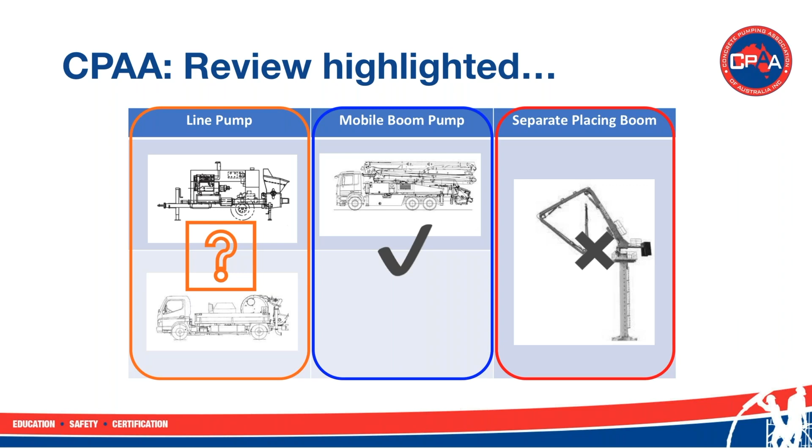I think the most controversial issue was a continued approach towards a prescriptive requirement for 6-yearly mandatory strip downs, and there was increasing conflict with a document that was nearly 25 years out of date with international standards, and moreover, manufacturers' requirements for modern equipment.

And I think the most controversial issue was some legal action which was potentially being touted, as the draft circulated for public comment was potentially triggering technical barriers to trade. I won't go into detail other than to say standards have a fairly clear responsibility to ensure they don't incorporate technical barriers that prevent trade under the WTO, World Trade Organization.

So after that review, we submitted a report to Standards Australia for their consideration. After a series of meetings with Standards Australia over 2015, Standards Australia decided to collapse the subcommittee, which was formed under the Cranes Code Committee, Subcommittee 15, and a series of open forums were conducted in 2015 to really engage with our key stakeholders.

Out of that 2015 meeting, we then drafted a project proposal, and we were essentially provided approval in early 2016, and a new technical committee, ME091, was formed and constituted.

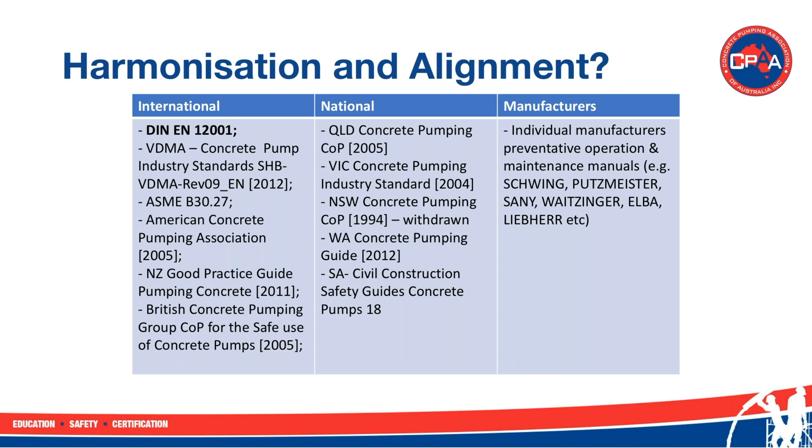So now that brings us up to 2016. The Code Committee kicks off and the document's published in 2019. I'm not going to give you a blow-by-blow description of what transpired over that period, other than to say from May 2016 through to January 2019, when Standards republished the updated version, there was a considerable amount of effort placed in engaging and consulting and work done on behalf of the Code Committee.

The point I'd like to highlight here is that in April 2018, when we went for the first public comment, we received a total of 129 comments, many of them fairly repetitive. In contrast to the 2013 review, where there were 400 plus comments, the committee felt somewhat satisfied that it had done the hard yards, and somewhat vindicated that it had done the research and produced the evidence to support the changes in the document.

So really that brings us up to the publication of the document. I'm going to spend the next sort of 20 minutes going over the summary of changes. It's going to be difficult for me to go through it line-by-line, but I'm going to focus on the key elements and then focus in on some key issues as we get to them.

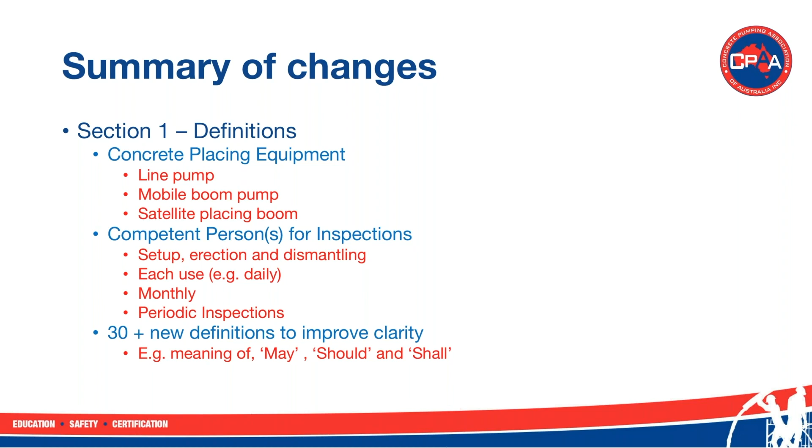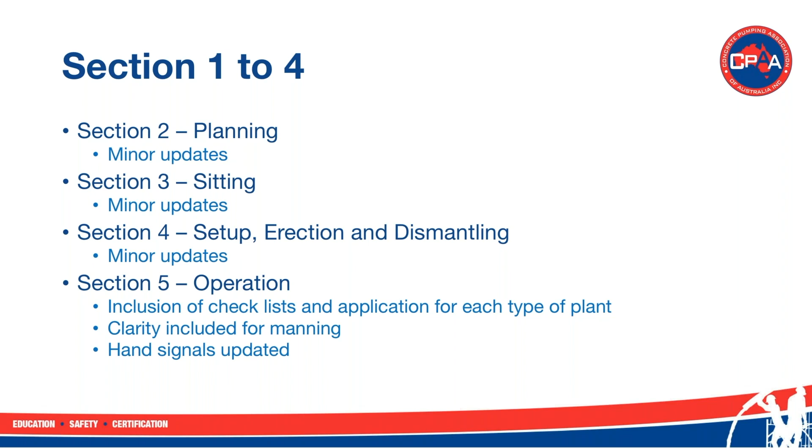So if there's ever any lack of clarity, the document gives advice about how each of those statements should be treated. The next sections are 1 through to 4: planning, section 2, some fairly minor updates; section 3, again minor updates; and setup, erection and dismantling, minor updates. With regard to section 5, that's probably an area we focused a fair amount of energy on, and in particular we included a checklist with regard to each type of plant.

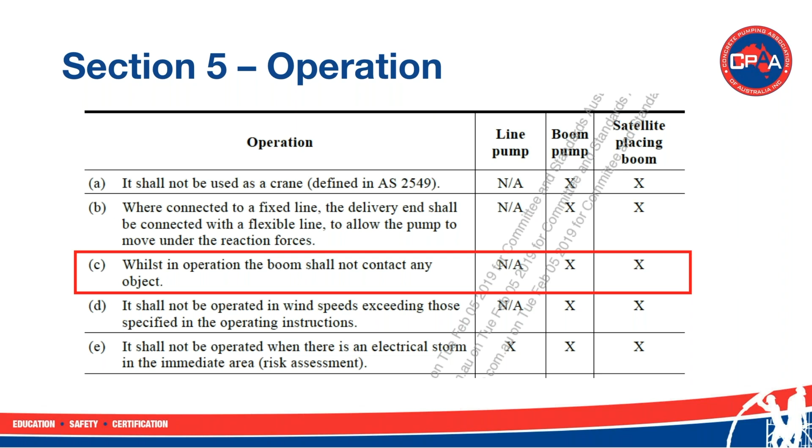I've just got a snapshot from the document to highlight an example of how that table operates. A particular operation condition is stated, and I've highlighted item C: whilst in operation, the boom shall not contact any object. For a line pump that's probably not applicable, but for a boom or satellite placing boom, that's important - it's a mandatory statement within the operational guideline.

Another example I wanted to draw on - and we at the association probably get a question on this every week - is with regard to outriggers or stabilisers. Many state safe work regulators have equally got opinions or views about this particular issue. But the way the association has articulated this is that modern placing equipment has sophisticated sensors built in to allow it to be operated either fully extended or short-rigged, which is something permitted by the individual piece of plant or equipment.

So we have incorporated within item F: where permitted by the manufacturer, short rigging conditions and limitations stipulated by the manufacturer or the competent person shall be observed before operating the pump, raising or unfolding the boom. Again, not applicable to a line pump, but clearly applicable to a boom pump. I think that helps clarify in the document how that should be undertaken.

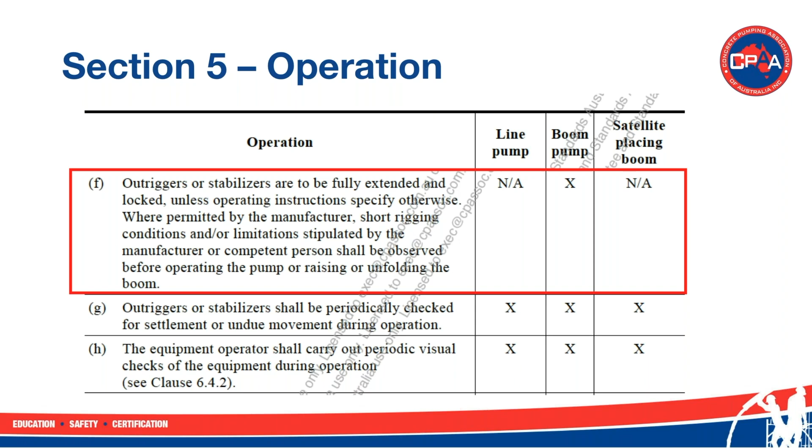And if your piece of plant or equipment does not have a manufacturer that stipulates the ability to short rig, then you need to observe the manufacturer's operating instructions.

The next item, in section 5, is around manning, and the association's taken many calls on this issue. In one of the drafts we were considering, it was viewed by state WorkSafe regulators that they wanted a minimum of 2 people operating on a piece of plant at any one time. Across our 1,300 concrete pumping operators, there are a lot of single-man operations, and that's part of how they operate their business and have for many years. A mandatory requirement for 2 people was seen as potentially closing their business down, or they didn't want to operate that way.

The manning discussion went on at length within the Code Committee, but ultimately we moved towards a recommendation statement: that the concrete placing equipment should be manned by a minimum of 1 pump operator or 1 boom operator, plus a line hand where required and a spotter where required. It's important to note, however, that the boom operator and pump operator may be the same person, with the one stipulation that they shall not manipulate the boom or handle the hose simultaneously.

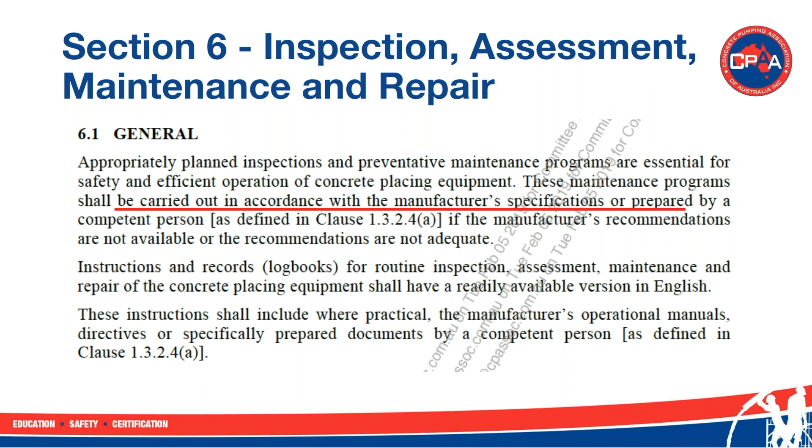Focusing on the relevant areas for major updates, these relate to logbooks for assessment and recording, pre-operational inspections or each use, which, as mentioned earlier, relate to daily routine inspections, monthly and periodic inspections, as per the criteria.

Also in section 6, we've expanded and improved provisions, catering for both single and double wall pipes. As many of you would recall, the 1994 document really only addressed single wall pipe because double wall pipes weren't available in those days.

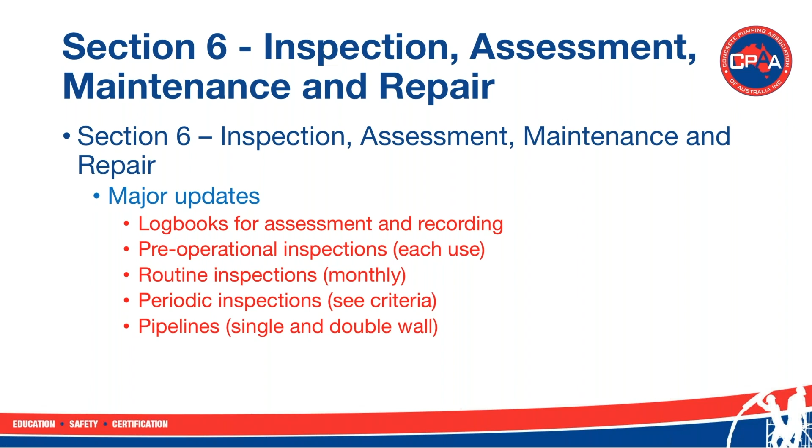With regards to the logbook, and this is an extract directly from the standard, the logbook shall, as a mandatory statement where applicable, record serial identification, hours operated, kilometres travelled, daily, monthly and periodic inspections, adjustments and modifications, part renewals, pipe wall thicknesses, boom and pedestal condition, outrigger beam and boxes, and safety equipment fitted.

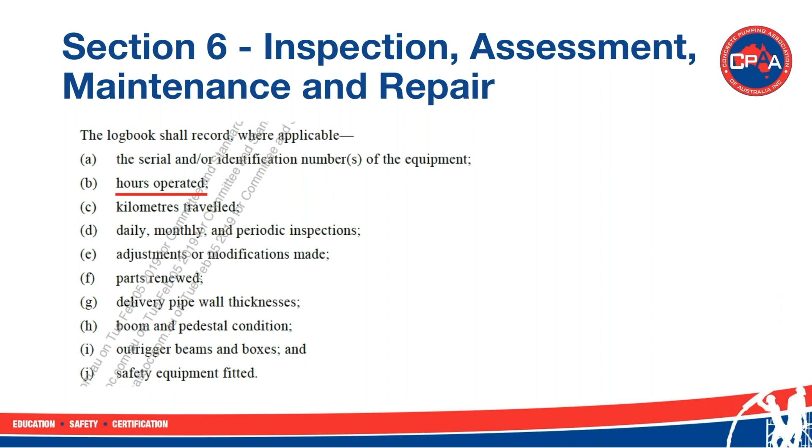With regard to periodic inspections, I'm going to focus on that area because both daily and monthly are predominantly similar to the way they were structured in 1994, and I think they're fairly self-explanatory in the document. But I believe periodic inspections require a little additional attention.

As a scene setter, many of you would recall that we talked about the old standard being a rather prescriptive one, and looking at international standards like EN 12001, moving towards a performance-based requirement or criteria. Using that as a framework, we've developed our periodic inspections to reflect a more performance-based approach.

Let me explain how that works. Periodic inspections have to be conducted by a competent person, which is again defined within the document. It's clearly a means for early detection and repair of service damage. That's a really important element in this.

Within the document, we not only make reference to the manufacturer's requirements, which are spelt out in the manuals provided by the manufacturer, but we've also incorporated a detailed inspection table in Appendix B of the document, and I'll show you in a little while what that looks like.

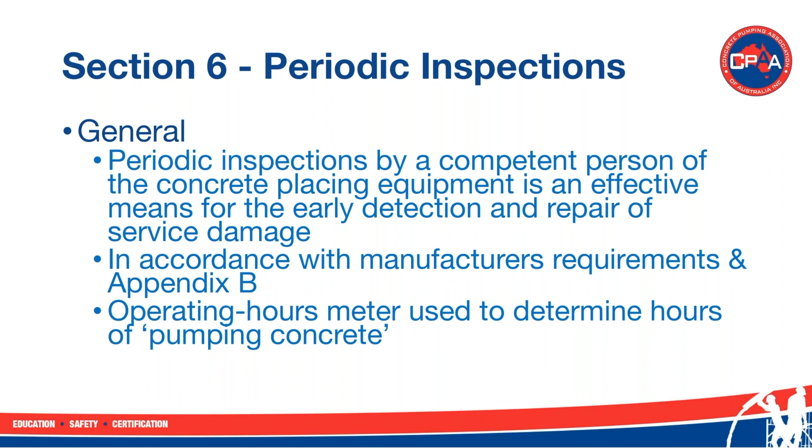With regards to hours operated, let me qualify that. In the document, we talk about the operating hours meter being used to determine the hours of pumping concrete. That's not hours of driving the truck, not hours of the truck or plant sitting on site with the engine running, but when it's pumping concrete. That becomes the key determinant for the table in the document to determine when a periodic inspection has to be conducted.

So let me explain this rather detailed, information-filled table. On the vertical axis on the far left-hand side, we're talking about the concrete placing equipment inspections: pre-operational, routine, periodic, and then there's a criteria below that from 0 to 5 years, 5 to 10 years, or more than 10 years.

Each of these, however, are noted by an asterisk, but not less than once a year, and I'll qualify that in a second. Across the top you'll see line pump, and then as defined, mobile boom and satellite placing boom. The preceding columns under each show the inspection criteria, for each use.

So if we look at clause 6.4.2, pre-operational, the inspection criteria needs to be conducted at each use. The competent person is detailed in clause 1.3.2.2 - the person that meets that definition, having the experience and qualifications, can undertake that each use. I don't believe that has changed dramatically from the requirements of 1994.

The same applies for routine, which is conducted monthly - the competent person to undertake that is detailed in clause 1.3.2.3. Coming across the page, in terms of the inspection criteria for mobile boom pump and satellite, the same applies for each use and monthly, with the same competent person as defined there.

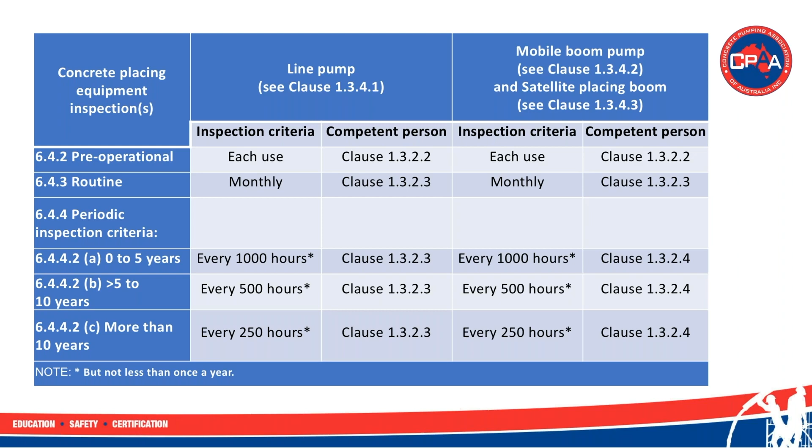Let me walk you through the stages of a periodic inspection, well detailed within this standard. The first stage is initially an audit of the equipment logbook to determine that required daily and monthly inspections and maintenances have occurred, review the record of defects, and determine repairs are being carried out.

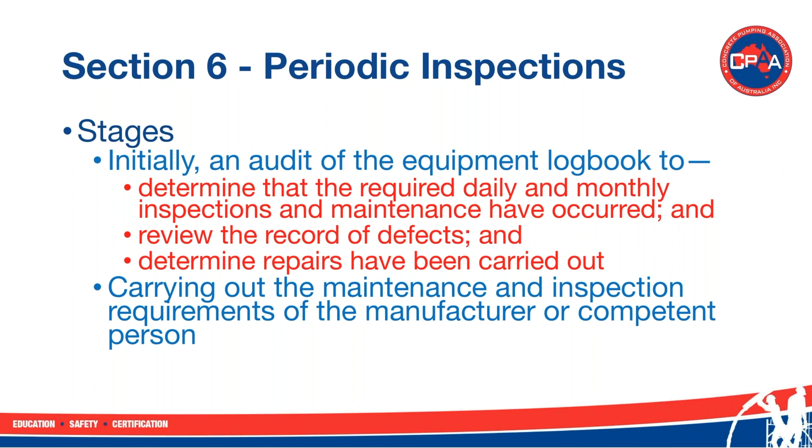Then you carry out the maintenance inspection requirements the manufacturer or competent person has defined. The next step is to complete the periodic inspection report, which is in the standard at Appendix B. That 6-page report is not a single-page statement, but represents a record of the inspection that has been undertaken. It's not a strip down.

There's no mandatory requirement to disassemble the complete pump or aspects of the pump, but to undertake an examination of the condition and components of the equipment, to take appropriate measurements of wear and tear based on the manufacturer's specifications, and to take records, whether photographs, and attach them as part of the report, but ultimately to note down aspects of wear and corrosion.

So if you bear with me for a second, I'm going to bring up the actual document and share with you an example of the report.

Okay, so Appendix B, Periodic Inspection Report. Much of the information is fairly self-explanatory: manufacturer, serial number, year of manufacture, and boom details, etc. Any particular additional features or modifications, and then you identify yourself as the person that's completed the record.

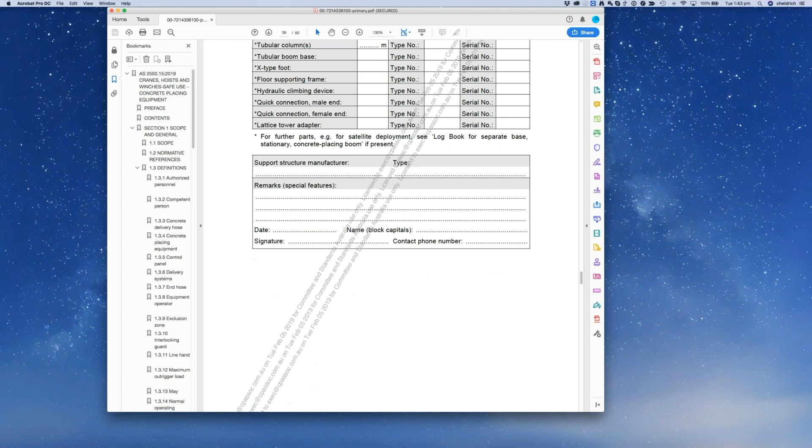In terms of general information, which forms part of the actual logbook, you need to note elements of the support structure. This deals with a satellite or separate placing boom and elements of the engineering related to that. Coming down, there is a schematic of a typical boom, and you'll note there are numbers associated with elements. They reference sections of the pump as they relate to the report.

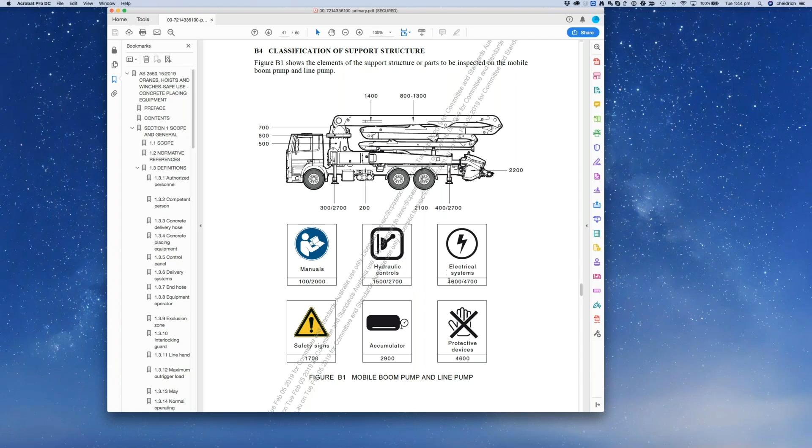You can see here that elements 100 to 2000, for example, relate to manuals. 1500 to 2700 relate to hydraulic controls. 4600 to 4700, electrical systems, so on and so forth. So when you look at elements of the support structure, each of them are detailed in a similar way, for ease of identification.

Now in terms of the report, and for those of you familiar with or who have seen EN 12001, we've adopted a similar fault code method when completing the report.

There will be 00 right through to 31 for re-inspection required, and then you identify various states, or fault codes, for each element that you're reviewing within the inspection report. For example, 01 would represent a crack, paint would be 09, or a bearing noise would be considered to be 13.

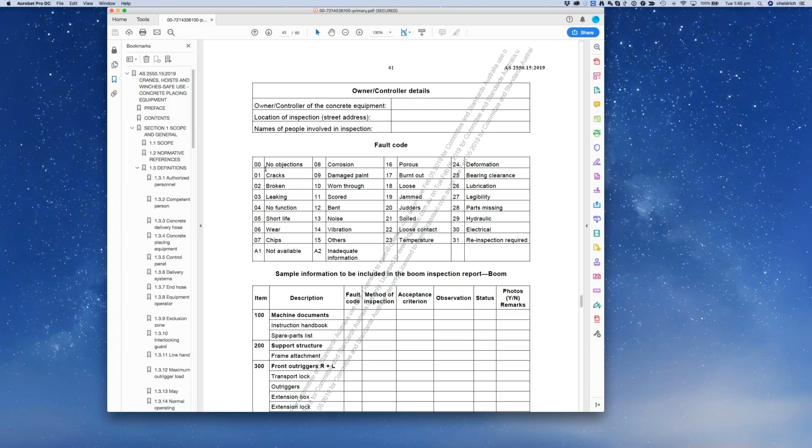Within the report, you only complete it for the relevant piece of equipment. You would identify the fault code, the method of inspection - so for a machine document 100, an instruction handbook, whether it was present, method of inspection visually, acceptance criteria was if that was present, and any photographs or remarks you might make. At the bottom of this standard, we've incorporated an example of how you may end up completing the report, just to give you some guidance.

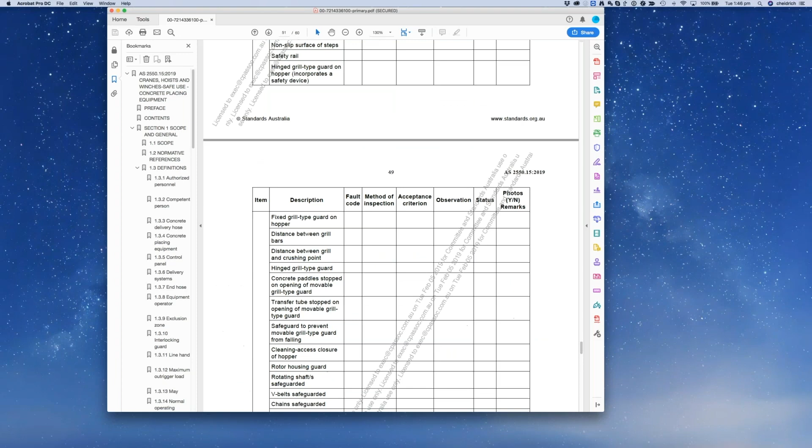So for this worked example, I've selected completed reports. The item was 300, a pivot bearing, no fault code was given, the method of inspection was using a dial gauge, the acceptance criteria, probably specified by the manufacturer, was 0.15 millimeter. What was observed was 0.12, so the status was okay, but no photo was taken.

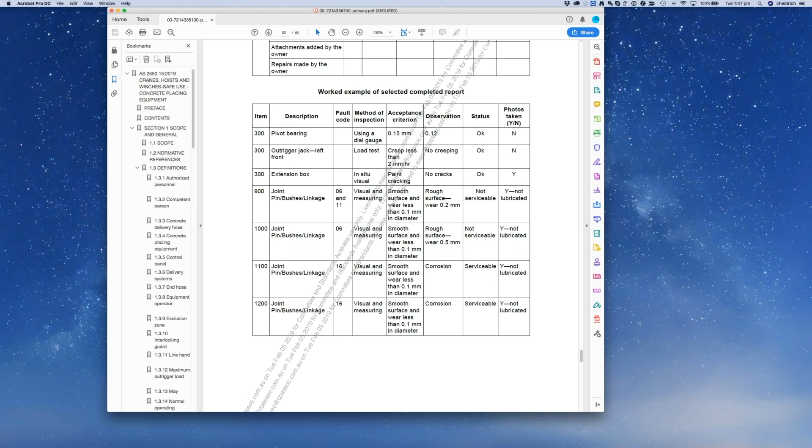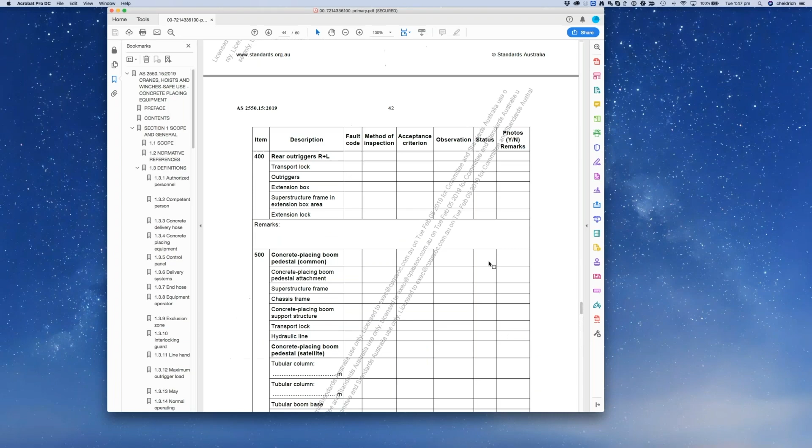But there are other examples where you would be looking at an extension box. There was some minor paint cracking, but no cracks were observed on the actual extension box itself. Status was okay, and a photo was taken to show that, incorporated within that report. These are matters for an inspector or competent person undertaking and completing this report. The association is currently working on developing versions of this report which could be built into our logbooks and used by members and non-members alike.

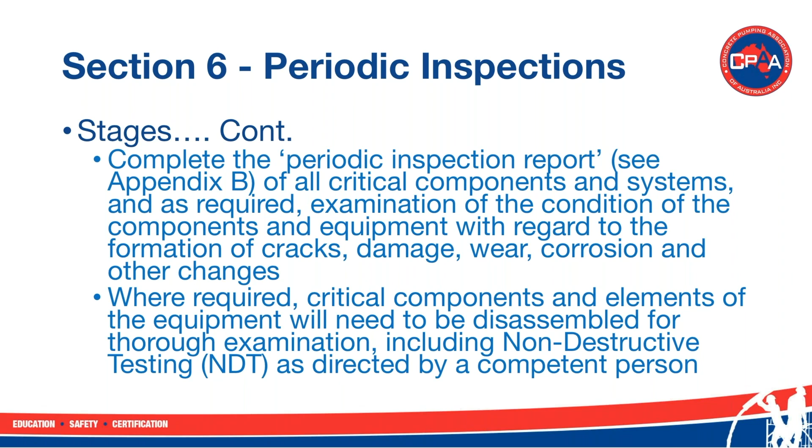There could also be use of non-destructive testing, NDT, as directed by the competent person. Once those stages are completed, the final stages are retesting of all safety functions, rectification of any defects that could affect safety, and assessment of suitability for continued service. The competent person, based on the report, determines whether things need to be done immediately, in the next 6 months, or in the next 12 months, from a risk hazard assessment. Then the competent person issues a certificate, dates it, authorizes it, and makes a statement for continued operation and service.

That, I believe, represents a major shift in thinking around the assessment, inspection, maintenance and repair of concrete placing equipment, using a performance-based approach where we're not pulling down brand new pieces of plant 6 years into service that may or may not have done a lot of service unnecessarily, but equally pieces of plant seeing high levels of demand or use are being inspected more regularly. That's where the performance-based approach is seen as relevant or applicable.

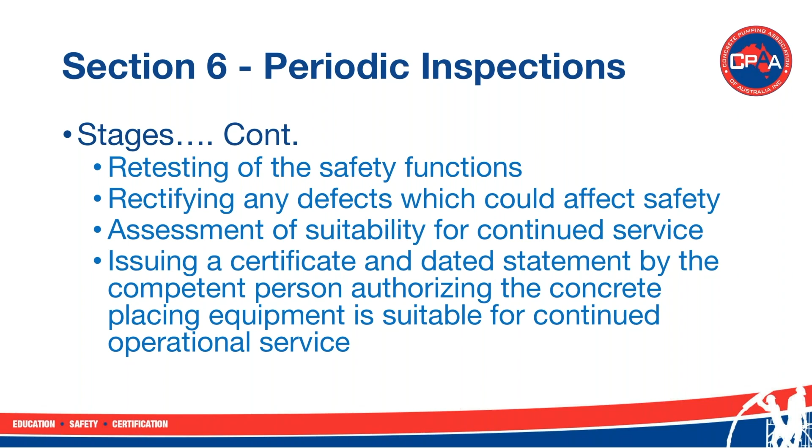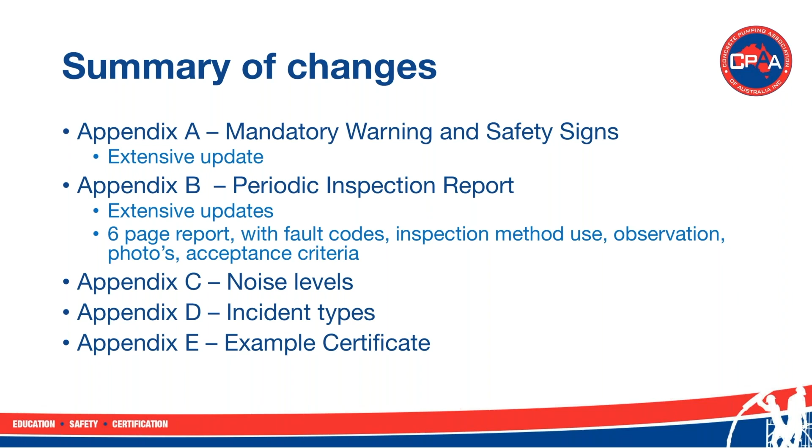In terms of the next section summarizing changes, Appendix A covers mandatory warning safety signs, which have been extensively updated and expanded to incorporate modern signage and notification - for example, one new addition from the association covers crushing incidents with the folding back of outriggers. The periodic inspection report has been extensively updated into a 6-page report with fault codes, inspection methods used, observations, photos, and acceptance criteria. Appendix C covers noise levels, D covers incident types, and E covers example certificates for continued service. So those represent the elements of the document as changed.

I'll quickly summarize a couple of things coming up very soon. Now that the document's been published, we've been working on a number of fronts while waiting for it to be finalised. One is an update of the existing printed logbook to incorporate the changes and new inspection reports. Coincident with that, the board has supported development of a digital, mobile-enabled logbook, which will be available towards the mid part of this year in a full version, with a beta version out by the end of March. We've already got a number of people signed up to help, but we welcome more. It will give you a significant advantage in terms of information sharing back to your office - more to follow in the coming months.

For more information, you can download your copy of the standard from the SAI Global website - do not go to the Standards Australia website, they do not sell the standard. They are literally the portal for management of code committees and development of documents, and they tend to be a bit slow updating their website with changes. As of yesterday, I took a screenshot of SAI Global, and I can assure you that 2550 Part 15 2019 is currently available on the website for about $249 or thereabouts.

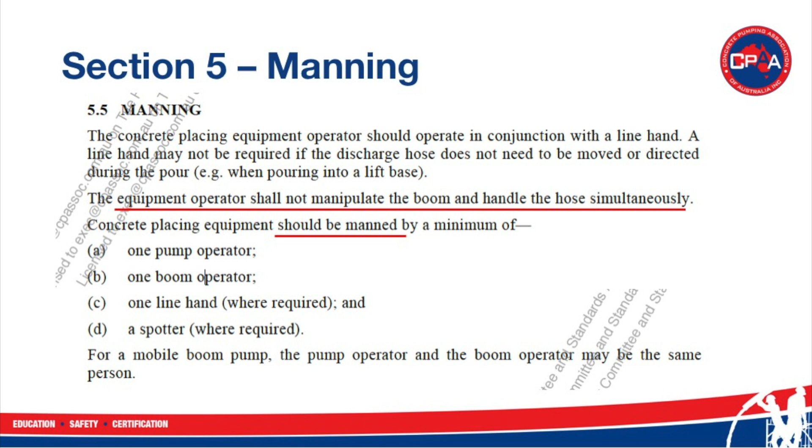Thanks, Anthony, I appreciate that. There's a general comment here, which I'll summarize as a question about the appropriate timeframe to implement this new standard. The standard is in effect from the 21st of January 2019. Many have asked when the first periodic inspection should be conducted. You're all required to do a 12-monthly, and one would expect that from the last 12-monthly you conducted, or if more recently a 6-yearly was completed, that would become the start date for conducting your first periodic inspection based on the performance criteria in Section 6.

Another question fired at me offline was, once a periodic inspection is done, does the birth date get reset? No, if it's a 20-year-old pump, it's a 20-year-old pump. If it's a 10-year-old pump, it's a 10-year-old pump. It continues on from that date. We don't grandfather the date from the original 6-yearly that was conducted. It basically starts from the last major inspection, whether it be a 12-monthly or a 6-yearly.

There's another question regarding clause 1.3.10, interlocking guards, asking for clarity on the last sentence. Interlocking guards are designed to prevent the hazardous function of operating unless the guard is closed, e.g. power will shut off and moving parts of the machine are stopped if the guard is open. The hazardous function does not automatically start when the guard is closed.

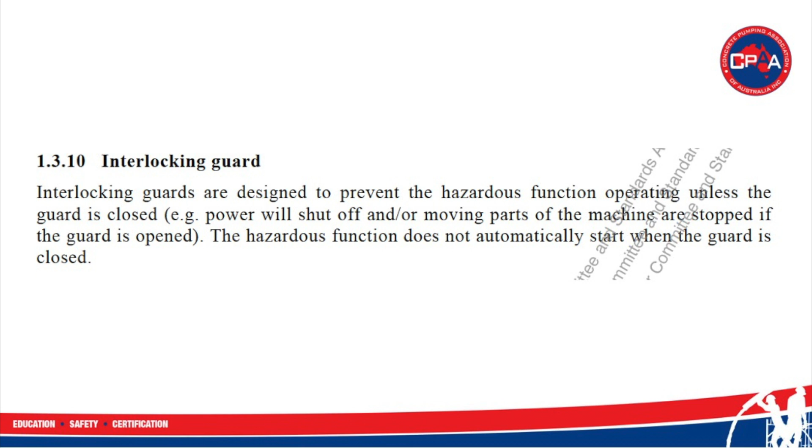Yeah, I heard a number of examples during our standards committee. There's another question regarding definitions - Simon asked if it's okay for a pump operator to undertake a monthly inspection, referencing 1.3.2.3, competent persons for routine monthly inspections.

A trade person in the field, a fitter, mechanic, or person has completed training and gained specific experience inspecting similar types of concrete placing equipment and their methods. I think the simple response is that if that person, pump operator, has gained experience inspecting similar equipment, then they are considered competent. As the business operator, it's your duty of care to demonstrate that through your own records. I think there's a requirement for most people to at least evaluate that and look at the VOC's verification of competencies, ensure their people are competent, and verify their competency on a regular basis.

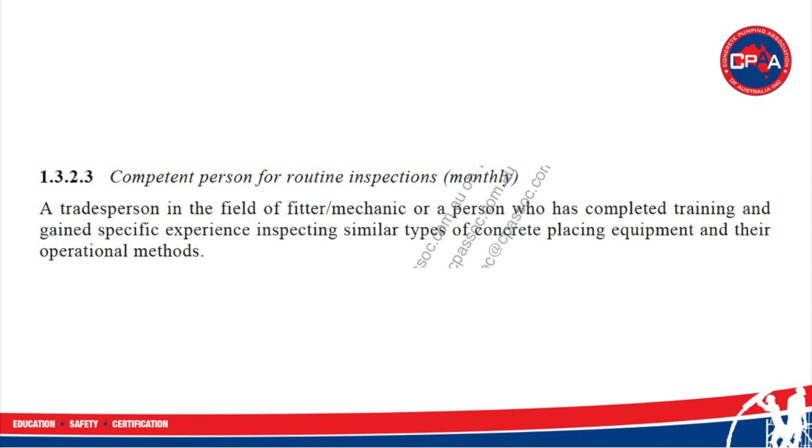Another question from Craig. What penalties are there in place if the operator is on the hose and moving the hose while pumping? Is it a fine for the operator and owner? Who will police this? Craig, my simple response to you: standards aren't laws that police and regulators will operate on.

I think the simple response is that if a safe work inspector did see an operator managing the pump and handling the line end under this standard, they could seek to undertake a prosecution, and each of the states will have different penalties that would apply. They'd obviously have to prove the case, but who would police this? That would be safe work.

I suspect that on any construction site, any informed builder or principal contractor in control of a site, if they're aware of these requirements, also might bring this to your attention. But ultimately, the association is not going to be sending people out to do inspections. I don't believe police will be involved in this. This will be one of those things industry will kind of self-regulate. And if people choose to avoid those requirements and an incident occurs, I'm sure those agencies will undertake whatever prosecutions they believe are appropriate.